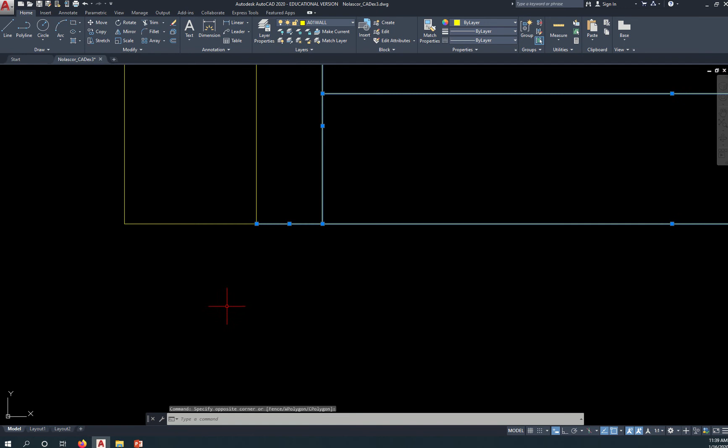Now, when you are doing your drawing, it's always best to change the properties of the lines in the proper layer. Now, notice here, I've actually created a line that is separate from the other lines. So that's one line segment. This is another line segment. That's another line segment. Okay? This is another line segment.

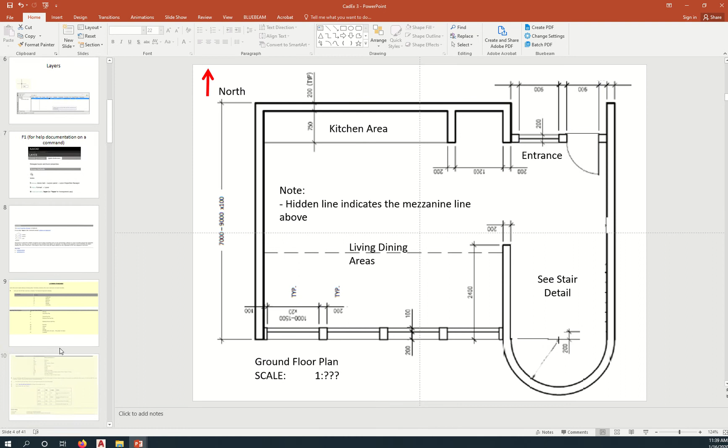Why do I do that? Because each line, to represent it properly, has to have a different thickness. So this will be thicker than this line. So if you go to your PowerPoint, you're going to see here the line weight convention graphic standards for Sheridan.

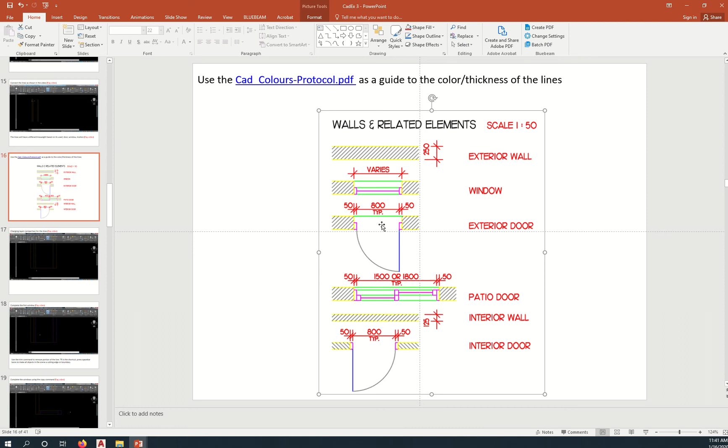And then here, that's just the line of the wall below. If you're cutting through a window looking down, then you also assign a medium color. So, if you have different colors, you need to actually create different lines, so you can assign them to different colors.

So, since all of this belongs to the window layer, I'm going to select all of this and change it to the window layer. Now, the window layer has one color property, which is medium, magenta. Now, how do I change this to green? I simply select that. It still belongs to the window layer, but then I change the color property to green.

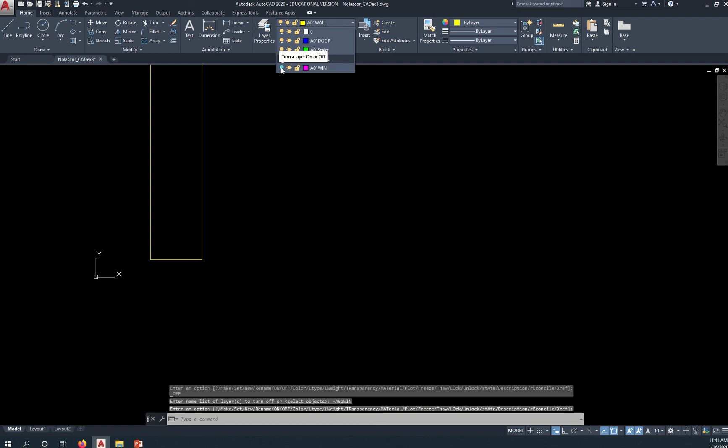So if I turn off the window layer, it will turn off together with the rest, but the color is different. So very important. Before you continue drawing, it's nice to place them in the proper layer immediately, so that there's a nice command after that.

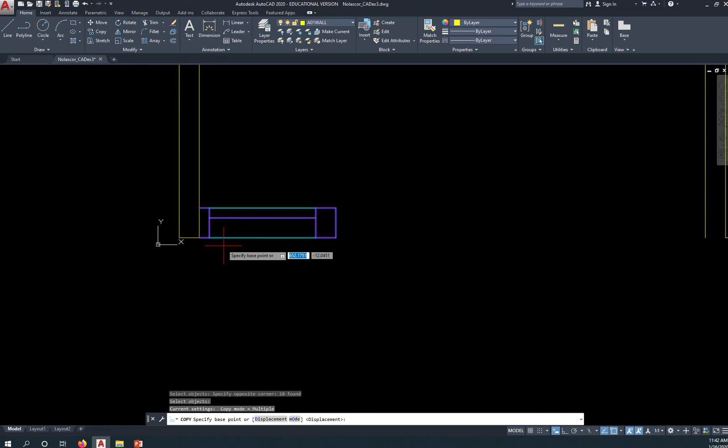Now, instead of drawing it one at a time, you can type CP or copy, and then I can copy this, select that, copy it from this base point here, and copy it over there. And then you can copy it again. Nope, I cannot copy it that way. Sorry. Undo. Control Z, right? My favorite command. There you go.

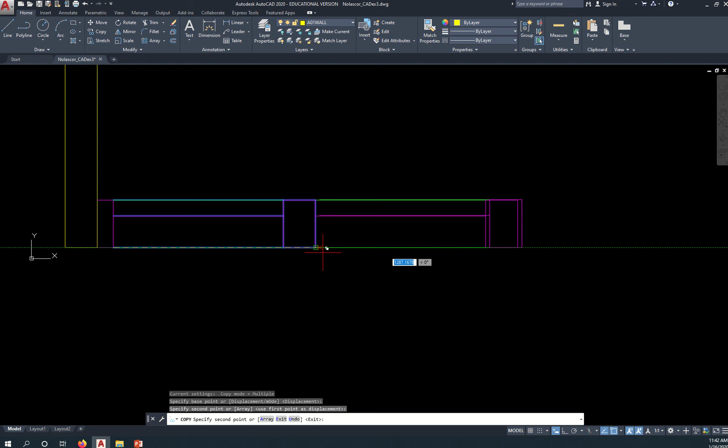I shouldn't copy this because this is only 100. So I'm going to say copy. I'm just going to select this and copy from here. Now, this makes sense. And place it there. The nice thing is that now I have all of this in the right layer with the right color, instead of doing it one at a time and placing them in the proper layer again. So do it once. Once you have a nice copy, then you can make copies of those.

Another command that I can now do is mirror. So I can mirror this here. I need an opposite image of this set of lines, and my middle point will be the midpoint of this line. So I'm going to say mirror. So copy and then mirror. So I'll mirror this.

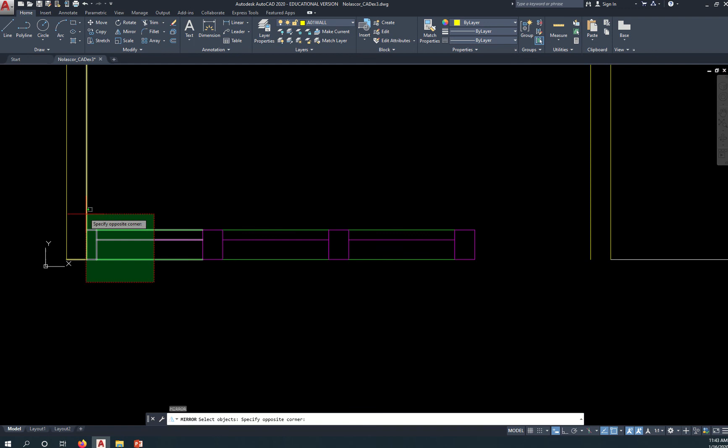From the mid of this line. Turn F8 on, and click. Do I want to erase source object? No. Enter. And I'm done with my window. So that's a good technique. Try to do that. If you've done it already, erase and try to do it the way I did it. I'll go around to answer questions.